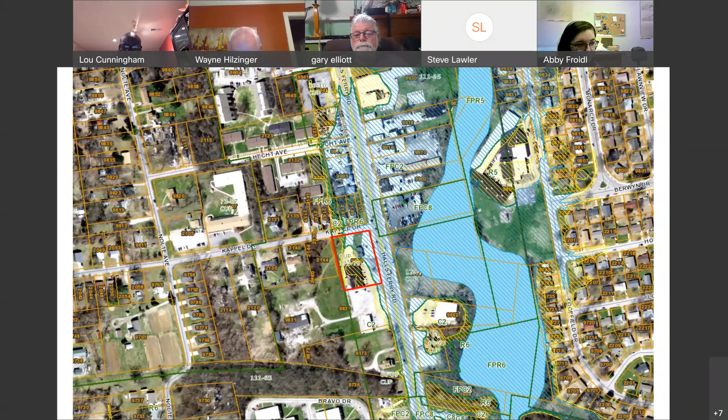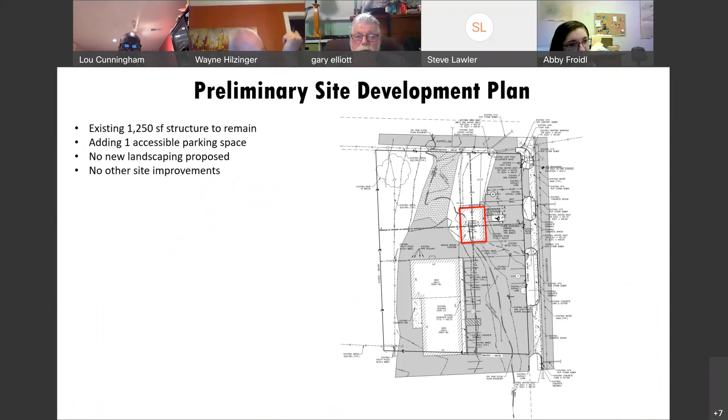Here's a second aerial where you can see the commercial frontage along Halls Ferry and the residential behind. This is the preliminary site development plan presented at public hearing. The existing 1,250 square foot building will remain. They are proposing to add 1 accessible parking space. No new landscaping is proposed and no other site improvements are proposed.

The planning department is recommending the petitioner close the eastern entrance from Kappel Drive as directed by the St. Louis County Department of Transportation, and close the northern entrance from Halls Ferry Road if directed by MoDOT. We're also recommending revising the use of wheel stops to control traffic within the site as approved on the site development plan. The site will also have to comply with the landscaping and lighting requirements for the underlying C2.

The department recommends approval of this request. We find that commercial zoning is in keeping with the surrounding land use and that a vehicle repair facility is appropriate at this site, which had been used as a vehicle service center from 1954 through 2020. We're recommending that the eastern curb cut on Kappel Drive be closed as directed by the County Department of Transportation. Additionally, no wrecked or damaged and immobilized vehicles may be stored on the site for more than 72 hours, which is a requirement from the zoning ordinance.

Okay, we need a motion of some kind. Anyone? I make a motion we accept it with the changes that were noted. Do we have a second? I'll second it, Lawler.

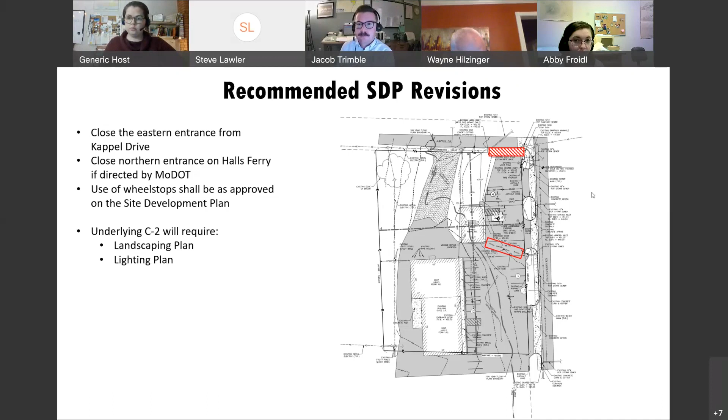That was my last question. Would we see it? So yes, it's okay. I didn't second it. Yeah, I did second it. I seconded it, and I'm good with that. Yeah, I'm good with that.

From what I remember, the building desperately needed a paint job, and the parking lot itself was full of potholes and desperately in need of overlay resurfacing. But I just don't think we should just hand them a zoning and they do nothing in return to improve the area.

Was there a condition put in to require the parking lot, at least in front of their use and in their general vicinity? I'm not saying this would necessarily require the entirety of the site, because it's a larger site, but that there be resurfacing or at least repair of the parking lot.

I think it's as directed by transportation because it's in the floodplain. But given it's already paved, they should be able to resurface it. I mean, we can add a condition into attachment C. That's clear. Okay, thank you, appreciate it.

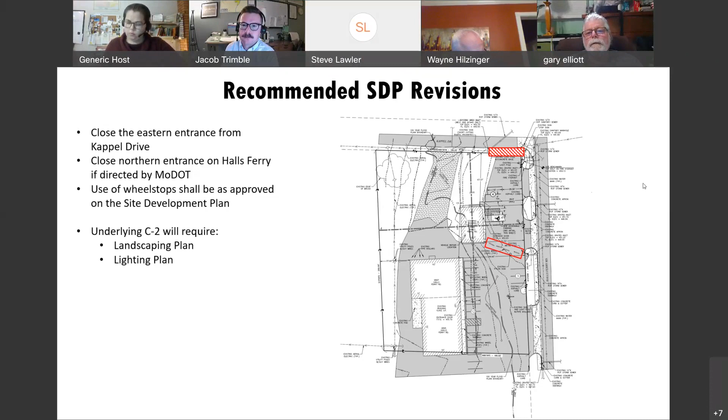Anyone else have anything? Seeing none, with those items being added, all those in favor? Aye. Aye. Opposed? Ayes have it, 5-0.

We'll go on to the next one, which is PC 27-21, Jeremy King, the Watering Bowl. Good evening. This is PC 27-21, Jeremy King, the Watering Bowl. As you'll recall, this is a request for a change in zoning from R2 to C8.

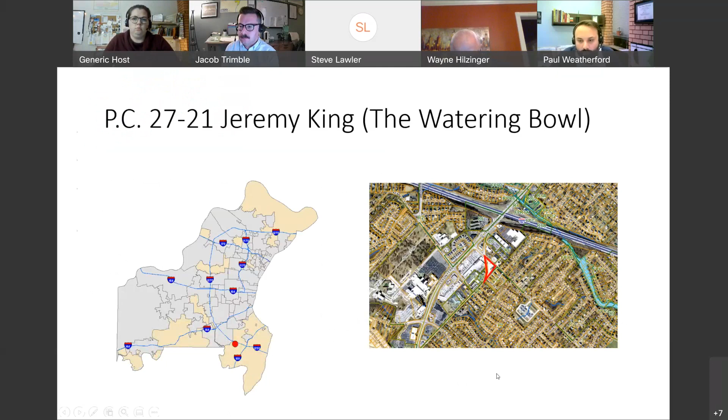For a 1.63 acre tract on the west side of the intersection of Mattis Road and Worthington Drive, and the east side of Old Tesson Road. You can see here from the county context, again it's in South County. You can see the parcel outlined in red. I did want to draw your attention to the unique triangular shape of the parcel, which you can see in more detail here. There are some challenges presented by the triangular shape of the parcel.

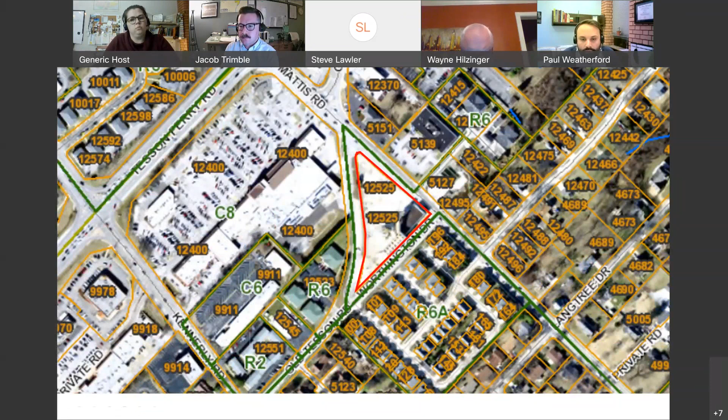This is the preliminary site development plan shown at public hearing. The petitioner is proposing the adaptive reuse of the existing structure, as well as adding an enclosed turfed play yard just to the west and north of the existing building, immediately adjacent to it. There are two curb cuts proposed along Mattis Road, one way - one inbound, one outbound. They're showing landscaping along Mattis Road and the interior of the parking lot, and some additional trees further north along Mattis.

The Worthington Drive right-of-way - the structure, where it begins at Mattis and goes along Worthington Drive, has a 10-foot setback, and then the structure, the facade, comes up to the Worthington Drive right-of-way as you go along Worthington, with no more setback from the building to Worthington Drive to where the building ends.

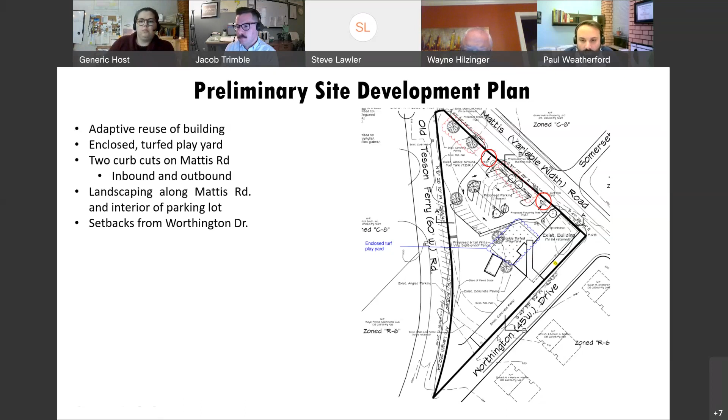Some recommended revisions to the site development plan include additional landscaping both along Mattis Road, but additionally along Old Tesson Road. There is an excessive amount of pavement on this site, so restoring that to a more natural state and putting a landscape buffer yard along Old Tesson is recommended. And since there is no buffer yard on Worthington Drive, in lieu of landscaping, we're recommending an art installation of some sort, whether that be a mural or a unique design or what have you. We're leaving that up to the petitioner or developer to submit something, but the idea would be to increase visual interest, to break up the facade a little bit, so you're not just looking at a big wall. That's to increase the aesthetics of the site in lieu of the landscaping that can't be provided.

Additionally, the petitioner is showing chain link fencing around the perimeter of the site. The turfed play yard, where the dogs will be outside, is shown as completely enclosed by a sight-proof fence.

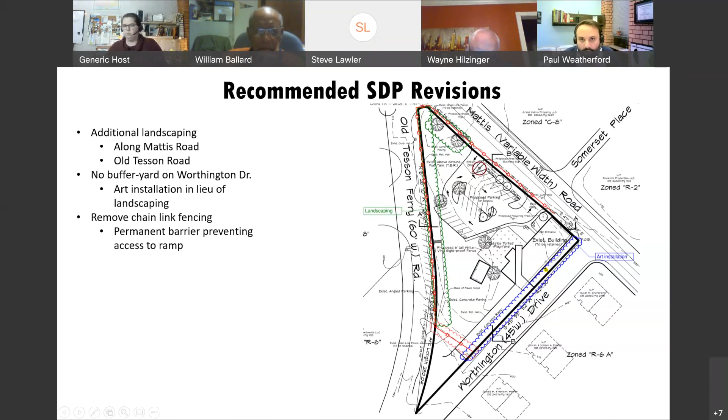So the department doesn't feel there's a need for perimeter fencing anymore. I would call out though that we are recommending a permanent barrier be installed on the southwestern corner of the site along Worthington Drive where the ramp starts, just to prevent unauthorized access as a safety concern.

We're recommending approval. The commercial zoning is reasonable and is in keeping with the surrounding land use and development pattern. Additionally, the triangular shape of that lot really makes residential uses untenable, coupled with lot size requirements in the zoning ordinance, and single family lot design standards would really make it difficult for a residential development to occur on this site.

The C8 Plan Commercial District procedure allows for site-specific conditions of development to protect surrounding permitted land uses, specifically those residential land uses to the east of the site. The proposed use aligns with the goals of the 6 County Council District Community Area Study, which recommends commercial development along the Tesson Ferry commercial corridor, particularly development that would serve the needs of businesses in the area, as well as the individuals in the surrounding neighborhoods.

Some specific conditions of development that we're recommending include architectural review, including any art installation and signage that would be proposed, limiting the height of lighting standards to 16 feet in keeping with the maximum lighting standard height in a residential district, and enhanced landscaping to include Missouri native plants, as well as landscaping along the old Tesson Road. At this time, I would ask for a motion for approval.

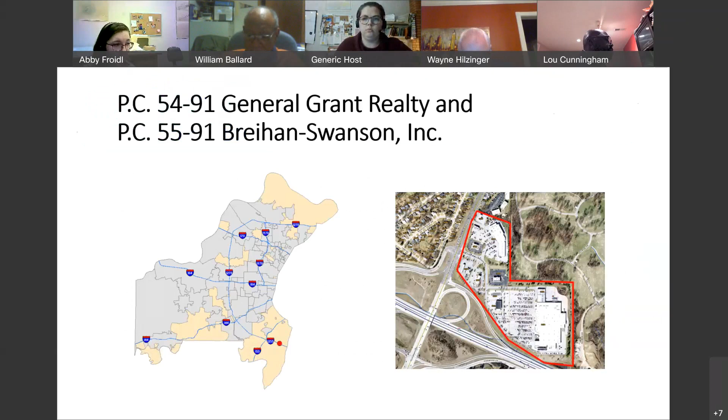And the next item is Communication General Grant Realty, 5491 and 5591. Yes, this is PC 5491 General Grant Realty and PC 5591 Breihan-Swanson Inc. It's a request for an amendment to C8 Ordinance 15,727 to increase the maximum square footage of the convenience store from 2,400 square feet to 2,700 square feet. This request is different from the thrift store request that you saw a few weeks ago on the same site. This is in a different part of the retail development. As you may recall, this site is in South County, and there you can see it outlined in red.

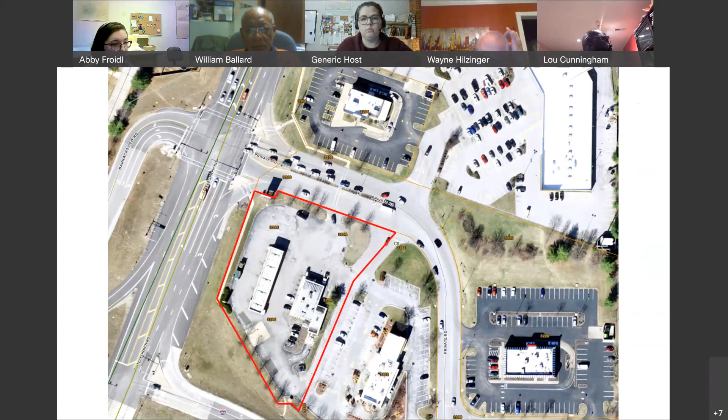Here is another aerial highlighting just the gas station and convenience store. It's at the western part of the site at the entrance from Telegraph Road. This is the preliminary site development plan. The C8 currently allows a 2,400 square foot convenience store with a 1,300 square foot car wash. The petitioner is requesting instead a 2,700 square foot convenience store be allowed with a 1,300 square foot car wash.

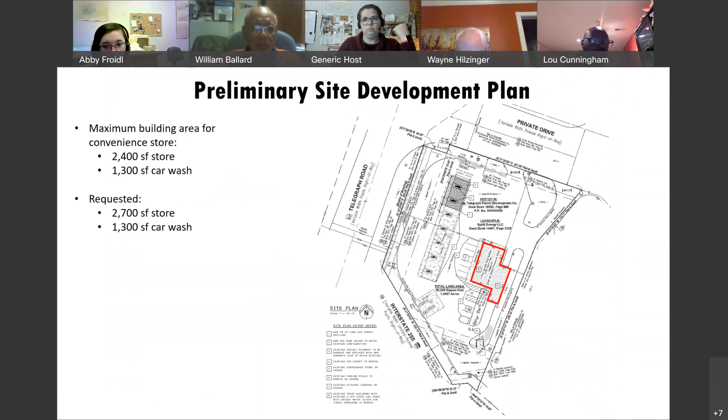The department is recommending approval of this request. We find that the proposed use is in keeping with the overall retail development at this site, and the petitioner is proposing a 294 square foot addition, which we feel is a minor change to the building size.

Okay, we need a motion. I'll make a motion to approve it. We have a second, Bill Ballard.

Discussion, anyone? Where did he get the extra 300 square feet? Did he get it internally or did he expand the building? It'll be a building expansion to add a walk-in freezer and storage, I believe. Oh, okay, all right, thank you.

Okay, anyone else? Seeing none, all those in favor? Aye. Opposed? Ayes have it, 5-0, and we've got two site plans.

First one is PC 04 and 05-21, McBride Berra Land Company. Tonight I have the site plan for PC 04 and 0521, McBride Berra Land Company LLC, for the Shadow Point subdivision. As you can see from the context map, the site is located in South St. Louis County, at Telegraph Road and Fine Road.

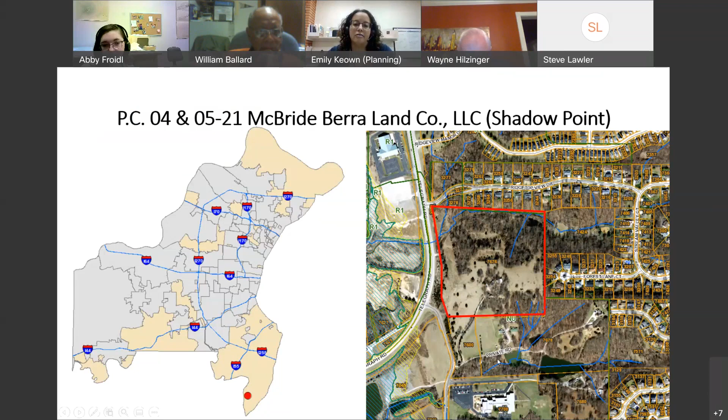Looking at the site plan, it's a 25.84 acre site with 53 single family lots. The site is accessed via an internal drive that terminates in a permanent cul-de-sac that does provide for connectivity for future expansion.

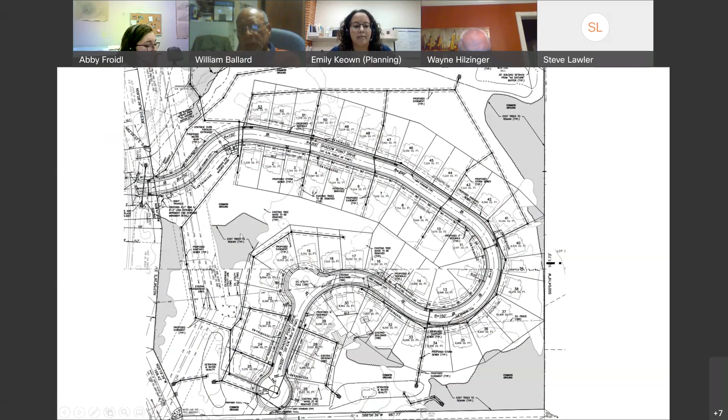This is a closer look at each side of the subdivision. The average lot size is 7,200 square feet with a minimum lot width of 60 feet.

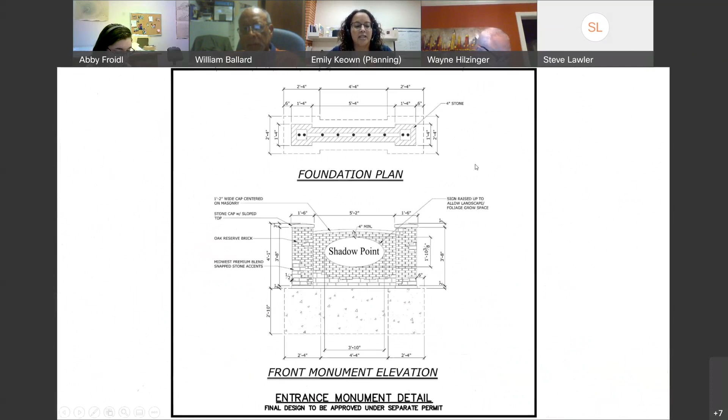This is showing the monument sign that will be brick and stone that will be placed at the entrance to the subdivision at Telegraph Road.

At this time, the department is recommending approval of this site plan. Okay, do we have a motion for approval? I'll make a motion for approval. I'll second it, Lawler. Discussion, anyone?

Seeing none, all those in favor? Aye. Opposed? Ayes have it, 5-0.

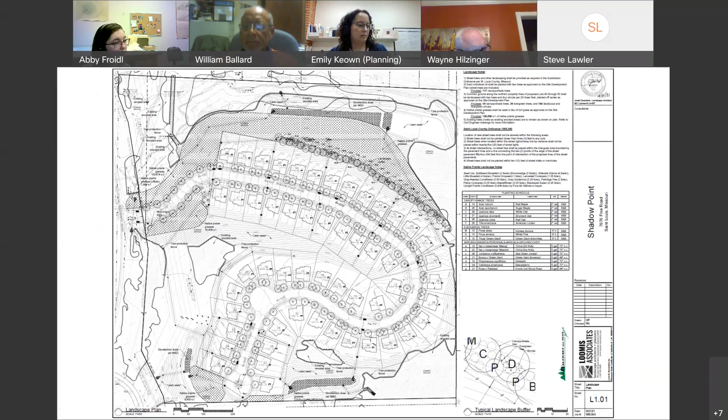And the last one is PC 149-88, Christian Hospital Northeast Northwest. This is a comprehensive sign package for Christian Hospital Northeast. You can see the site outlined here on the west side of Lewis and Clark Boulevard, north of Interstate 270.

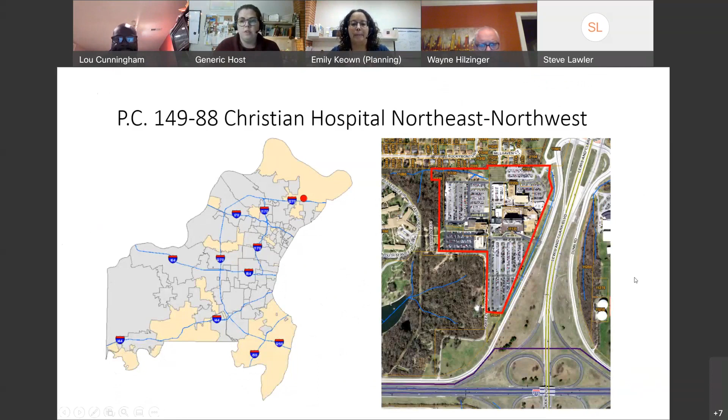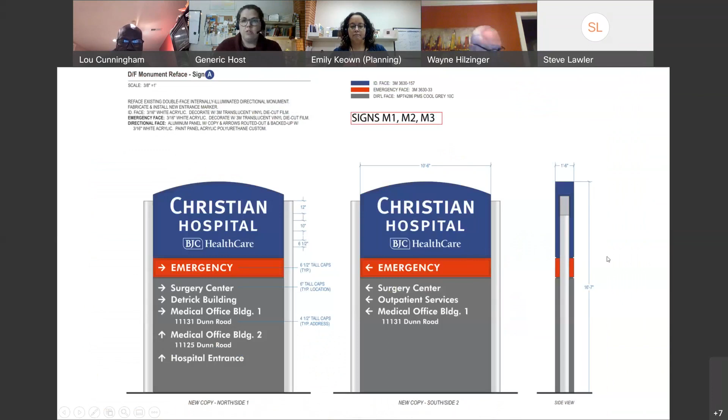These are the interior information and directional signage. Some of these signs, like the ones on screen now, are existing, but due to the proposed signs, they are coming back to utilize the comprehensive sign package to permit all their signs.

This is what they're calling the post and panel sign, the internal directional information sign. There are 28 of these, which would have different wayfinding items on the different lines. Some may say emergency, some may point you towards the different medical buildings.

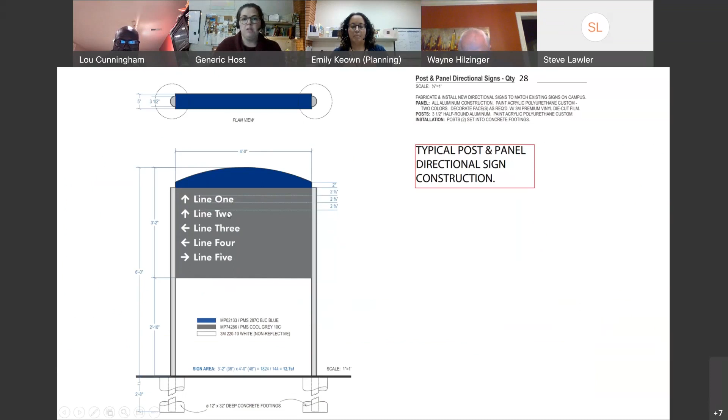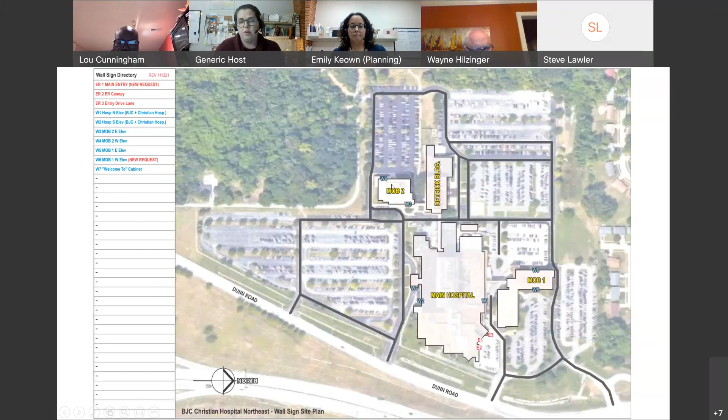This exhibit shows the location of wall signs. You'll see there's the main hospital building here, Medical Office Building 1 to the north and Medical Office Building 2 to the west. They are proposing 3 emergency signs over the emergency room entrance, and then wall signage for the main hospital building that looks like this: Christian Hospital, as well as the BJC logo on the north and south side.

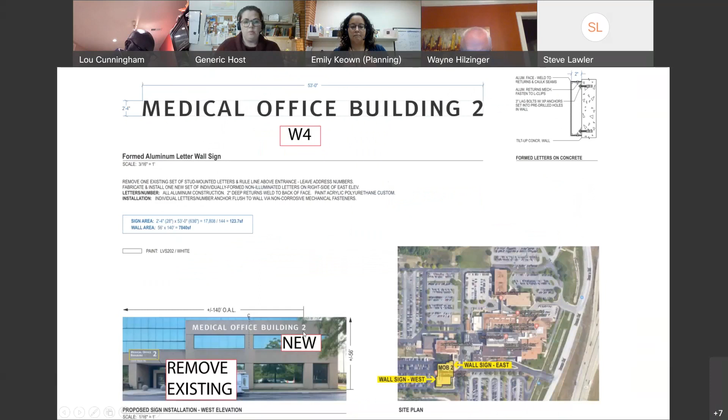Each medical building will have a sign on 2 of the 4 faces. This is for Medical Office Building 2, the eastern and western elevations, and the other medical office building on the north side, the east and west elevations. Then there is one canopy sign, Welcome to Christian Hospital, located at the visitor access on the south side of the site.

With that, we are recommending approval of this comprehensive sign package. Okay, thank you. Do we have a motion? I'll make the motion for approval. Second. Discussion?

Seeing none, all those in favor? Aye. Opposed? Ayes have it, 5-0. Anything for the good of the order?